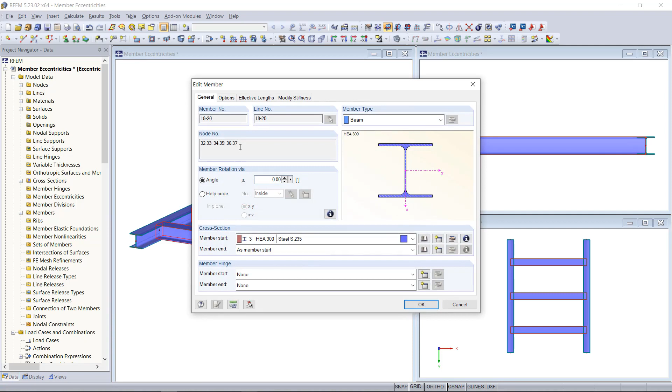Up here we can find in the Options tab Member Eccentricities, and if we click on the right side here we will enter a new dialog box to create a new eccentricity. So basically we have two options. We can set either an absolute offset or a relative offset. With the absolute offset we can manually enter a certain value, for instance in reference to the global axis, as the absolute distance to the previously used system lines.

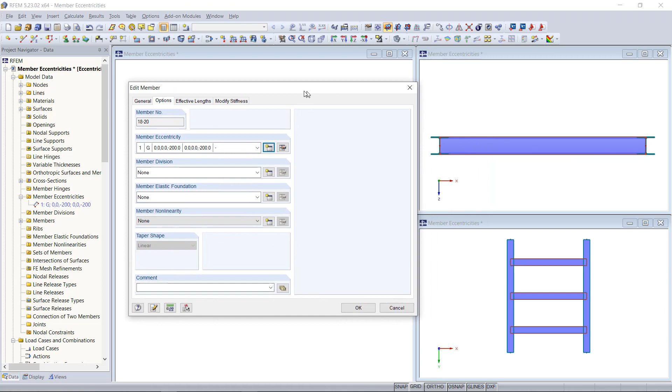Let's say we want to move the members upwards in the global Z direction, so we just have to enter an eccentricity, for instance of 200 millimeters for both the member start and end. Then we click OK, and now if you have a look here at the side perspective, if I click OK once again, the beams are getting placed upwards. In the wireframe model we can see that even better, so here you can see the connection.

The option Relative Offset allows us to create eccentricities for certain members depending on adjacent members. For the case that these members here in the middle should be flush with the other two beams on the right and left side, we can use this option. We can also enter the dialog for eccentricities directly using the project navigator. With the right click on member eccentricity, and then we choose new member eccentricity.

So by defining the point in the middle of the top flange, as shown in the figure on the right side, we can attach the middle beam members with their top edges to the other beams. So we click here on transverse offset and then choose the reference member out of the model, and then as axis offset we select the middle point down here.

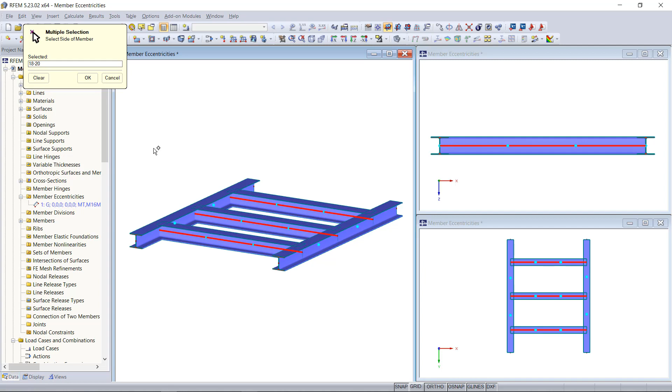So right now we have created the eccentricity, and as a next step we have to assign it to the members. We can do this with right click and then choose assign members graphically. In order to select the entire beam member, try to click in the middle of the members, like here, and then we click OK once again. So as you can see, the beams are automatically moved and we've just created a flush connection between the members.

It's also possible to edit the eccentricities if we right click and then choose Edit. Let's say this time we need that the bottom edges are connected to the top edges of the other members. Then we click OK once again.

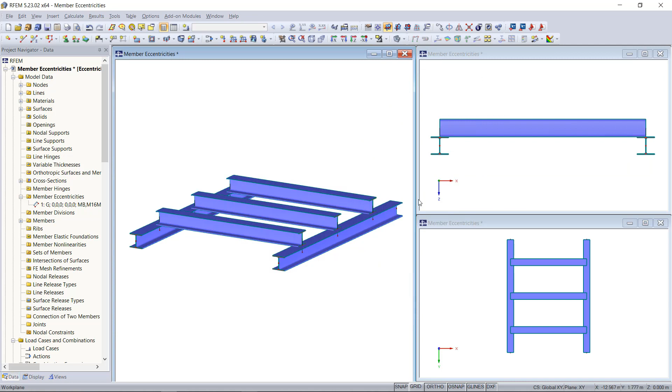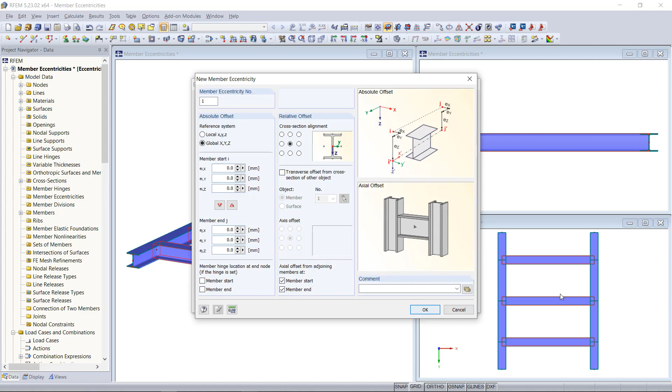In the Relative Offset dialog section, there is additionally the option of Axial Offset down here, which allows you to connect members eccentrically to the flange of members. If we want to have this for both sides, we have to click both member start and end. Now have a look at the top view, so the members are connected flush on the edges.

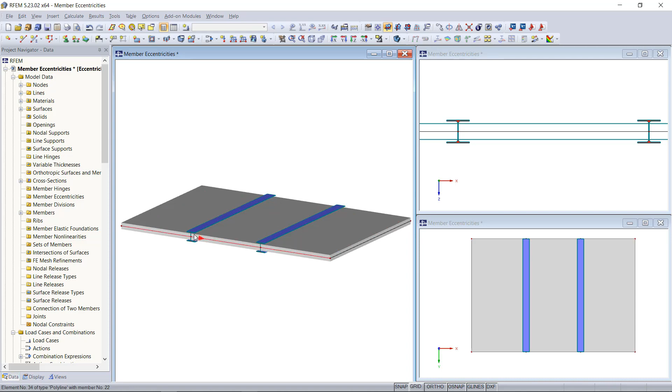We can not only create eccentricities between members, but also for adjacent surfaces. So as you can see for this model, the top edges of the two beams here should be connected to the bottom edges of the surface. So for this, we basically have the same procedure. And instead of member here, we choose surface.

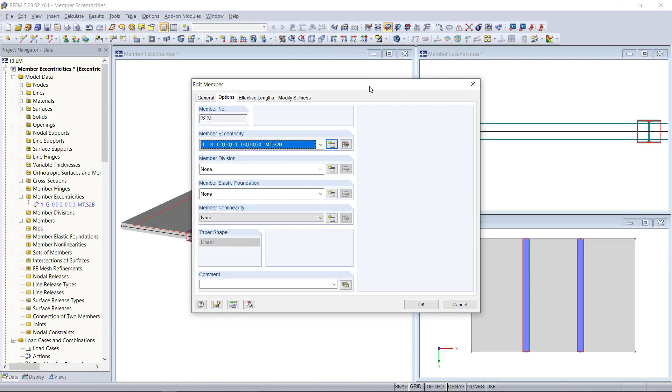Then we are going to select the surface out of the model, and as axis offset we select the bottom edge down here and click OK once again. Now we have also a flush connection between members and the surface.

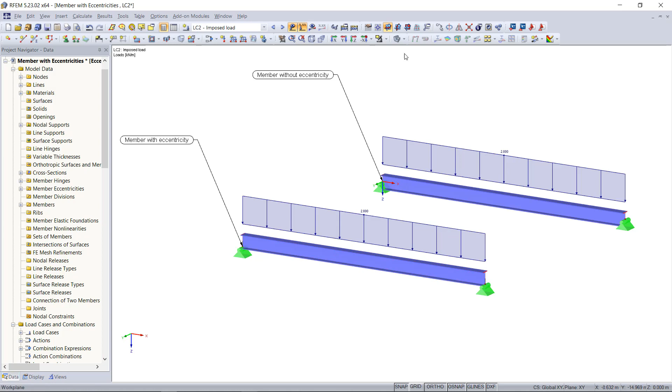As the last part of this video, I also want to show you what you do have to consider during your calculations. For that, I've prepared a very simple example. You can see here two beam members. The first one has an eccentric connection here at the supports, and the second one does not.

I've applied for both members a member load of 2 kilonewtons per meter, and we'll run the calculation for this. If we have a look on the results now, you will notice that the first member has boundary moments and the second does not. So this is caused by the eccentricity, as in the background a connection to the original node is created. So please don't forget to consider this point.